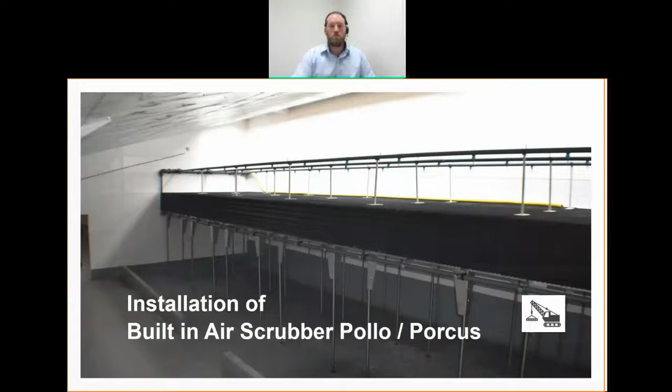This presentation is instruction on the installation of Pollo and Porcus built-in air scrubbers produced for Big Dutchman. Today's content will go through some of the considerations when building built-in air scrubbers, some of the requirements, and we'll go through the build of the table, the build of the pipework, and the placement of skids.

Biological and chemical air systems are built the same. There is a difference in the package. This is usually the thickness. You'll be supplied both 600 millimeter and 900 millimeter depending on the system. For chemical systems, a dosing system is used to inject sulfuric acid into the process water. For biological systems, dosing is an optional extra to stabilize the pH.

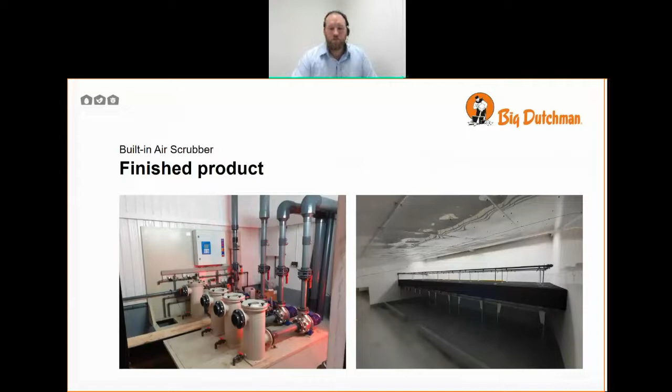Considerations: Are the air scrubber rooms the right size? Is the hanging wall the right height? Is the roof high enough? Are the holes for the drip catchers right? Is the technical room big enough? Are utilities available where required? Is there an access door to above the package area? Can holes be made from the tech room to the air scrubber room? All things you need to consider before moving forward to the build stage.

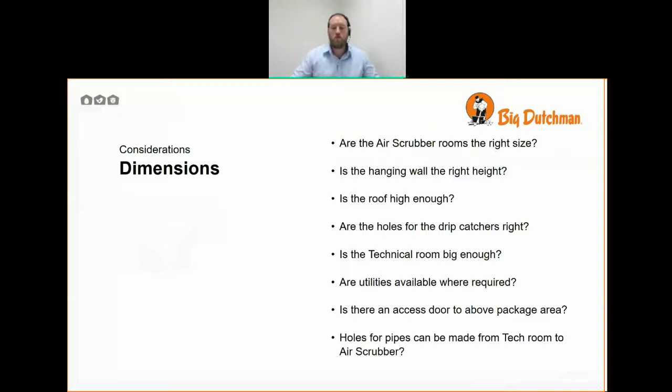For the process pit, are the pits and the underpasses the correct size? The technical room must be 300 millimeter higher than the lowest point of the air scrubber floor. I'll say that again. The technical room must be 300 millimeters higher than the lowest point of the air scrubber floor.

The process pit and the buffer area under the table must be built to hold water. And of course, all of the flooring and all of the pits must be coated so that they are both water and acid proof.

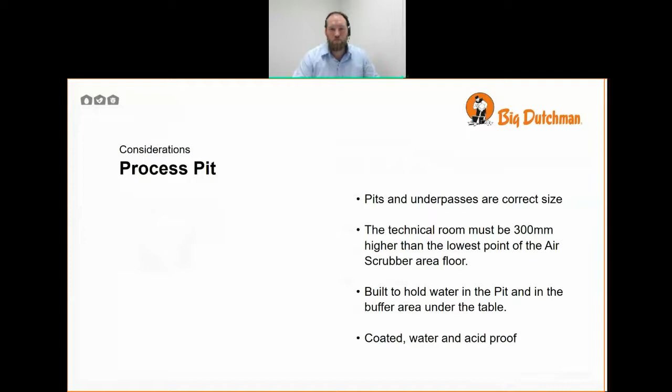Utilities: you will have and will require electrical power in. Do you need an electrician? There will be both water in and wastewater out. Do you need a plumber? There'll be pipework to build from the pump all the way up to the sprinklers. Do you need a plumber for this? And you'll need to build the table and lay in the packages. You'll need labor and people to carry out this work.

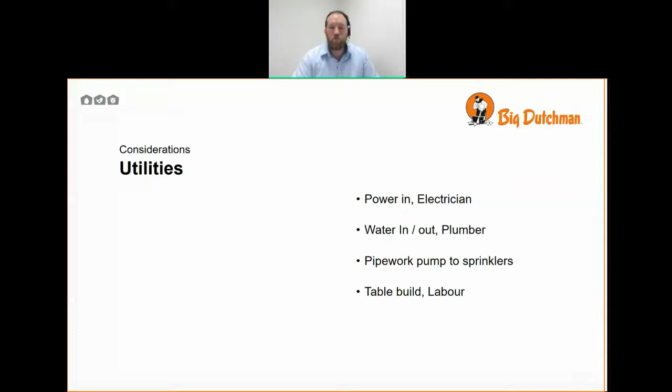Tools: you'll need spanners, sockets, impact drivers, drills. We advise that you have a step drill at least up to 17 millimeters for fitting the pre-sprinkling sprinklers, screwdrivers, hand tools, all regular things that engineers would carry. You'll need grinders with both cutting and sanding discs. This will be for cutting and trimming PVC pipe work, but it could also be required that on site something needs to be adjusted to fit with the air scrubber.

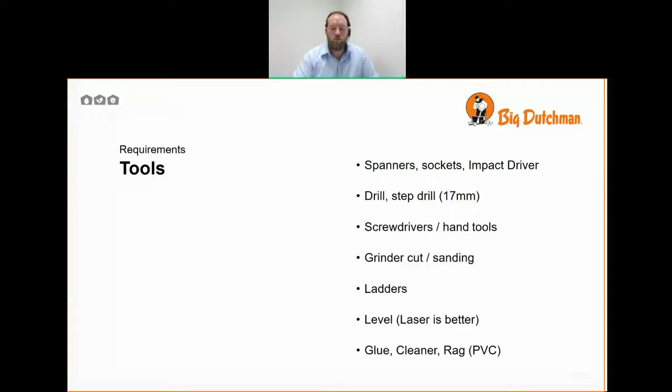Ladders to gain access to above the package area. Levels - it's very important this installation is made level. We use laser levels and we find they're much better, but a spirit level will do if you're in a pinch. And of course, for the pipe work, you require the correct glue or pipe cement, the cleaner for PVC pipe work, and rags to clean off the cleaner as you're working.

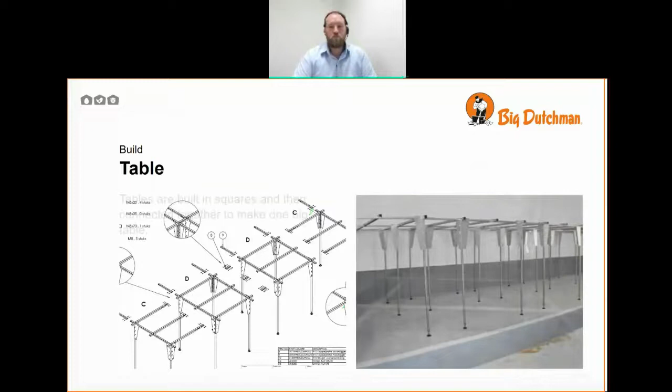Moving on to the build. The first thing we'll build is the table. This is kind of what the table looks like. This is what we refer to as the table. Tables are built in squares and then connected together to make one big table. They may be 1, 2, or 3 deep and as many wide as the concept allows.

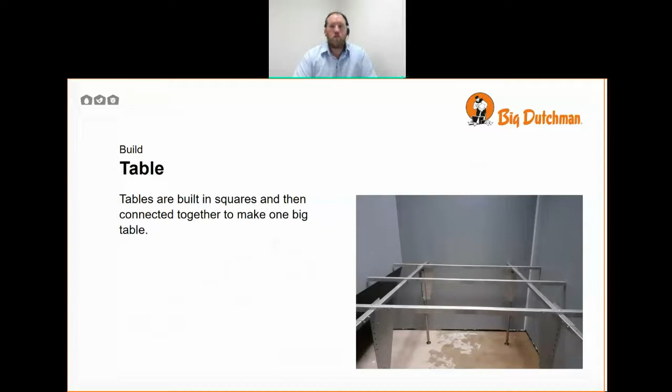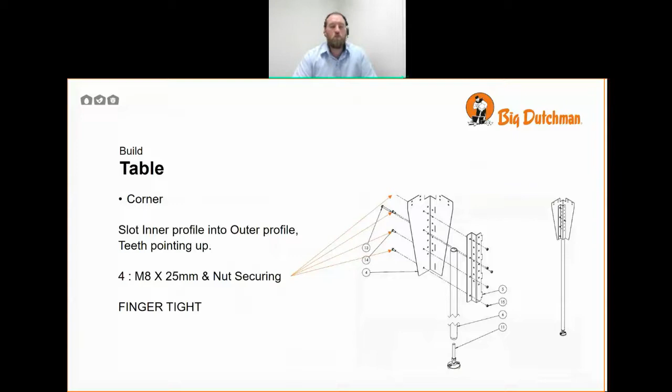We start with making a corner. Slot the teeth of the inner profiles into the outer profiles with the teeth pointing up. This will line up 4 holes on the other side. With 4 M8 by 25 bolts and nuts, we secure these together, finger tight, as loose as possible. For most of the build of the table, we leave everything as loose as possible. So you can see there, the bolts are still nice and loose.

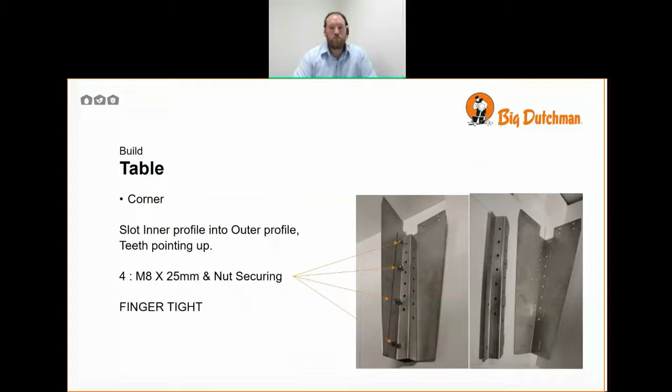For the leg, we lubricate the thread, the M16 thread of the foot, before screwing it in halfway. It's important to lubricate the threads so the table height can be adjusted easily later on. We suggest you use copper grease, though you could also use lithium grease or even silicone grease.

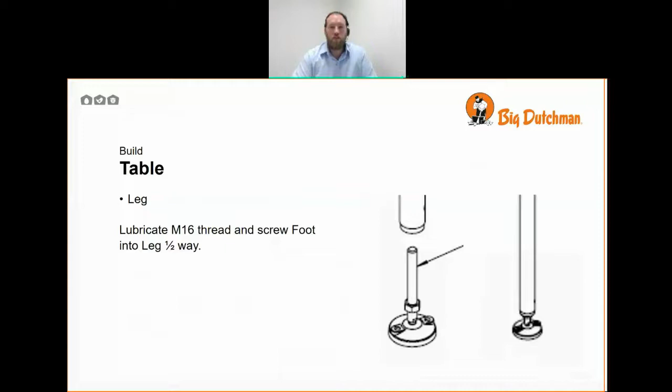The lubricant you use isn't so important, but the better the grease you use, the longer it will last, and the longer you will be able to adjust the table.

Don't tighten the lock nut just yet. Leave it wound all the way down, as you can see in the photograph.

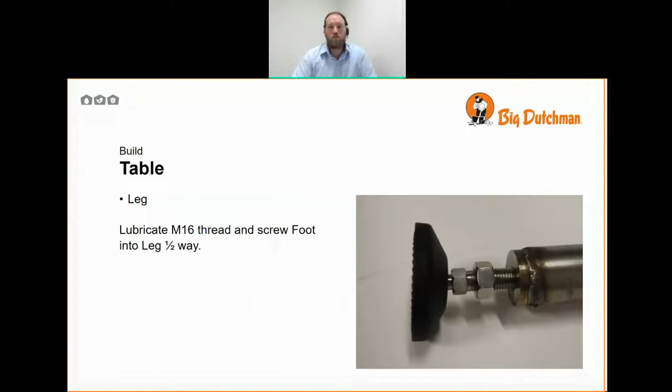Slide the leg into the small end of the profile and use 1 bolt through the holes to roughly set the height of the table.

For this, we use 1 M8 by 75 with a nut, again finger tight at this point. Everything should be able to move nice and freely so that when we get it in place, we can adjust it.

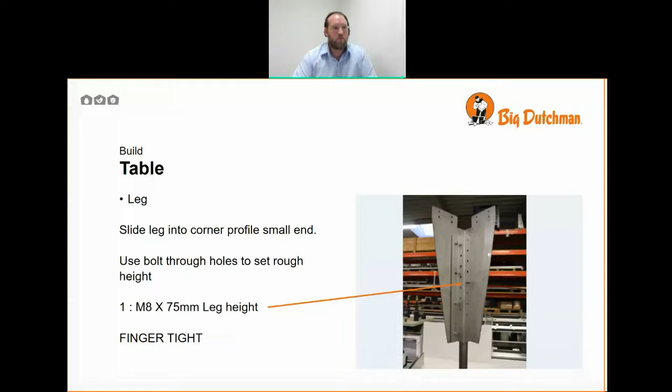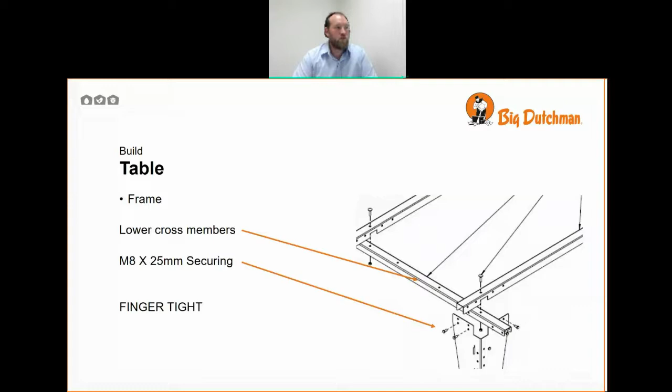For the frame, we have lower cross members that sit across and connect the corners together. These are connected at each corner with 2 M8 by 25, again finger tight.

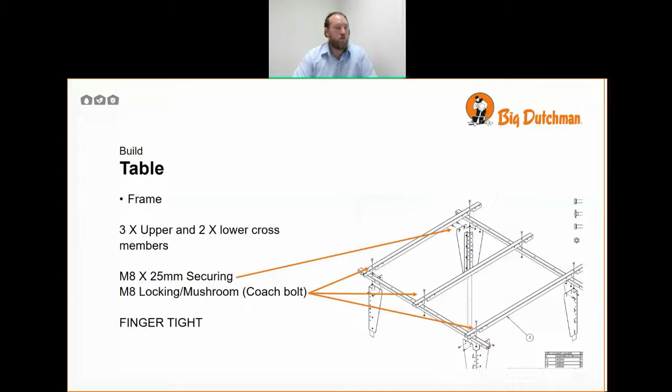On top of that, we have 3 upper cross members, again connected in the corners with 2 M8 by 25s, and then connecting down from the upper cross member to the lower cross member with a mushroom or locking coach bolt with a square head under the mushroom. Again, these are connected only finger tight.

So we end up with the square table looking something like this.

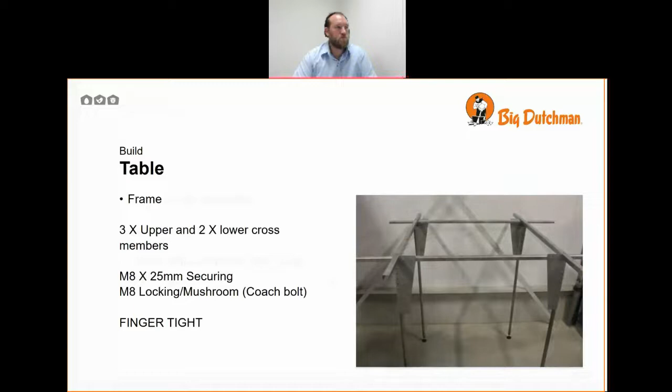Connecting the tables together, we use connection pieces that fit either end with 4 M8 by 25. These are only between the tables. The tables connect end to end, with no distance between them.

We do this until we have all except the last section of table built. Don't build the last section of table yet. I'll make that clear in a moment why.

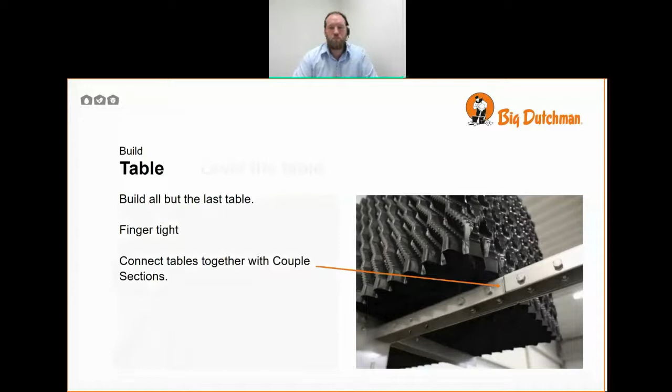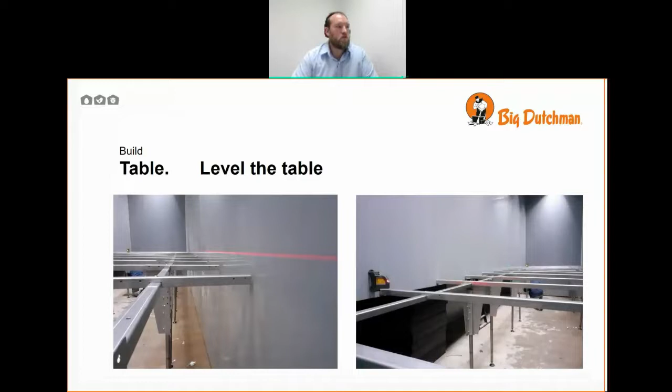Level up the table. We cast a level over the top of the table so that we can see exactly where we are, and then, using a monitor on each corner, we level up by twisting the leg on the thread of the foot. This adjusts the height of the corner to the right height.

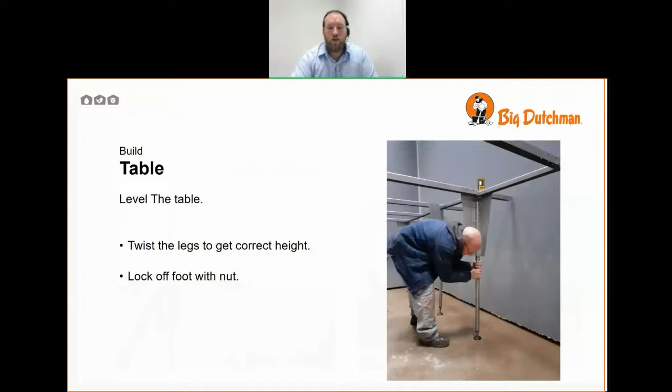We work from one end to the other in one sweep, and once the leg is at the correct height, we lock off the locking nut at the bottom to set the height, and then the whole table is correctly adjusted.

At this point, the whole table can be tightened. Every single nut and bolt, you can walk around and tighten with your 13mm impact driver to get every nut and bolt nice and tight.

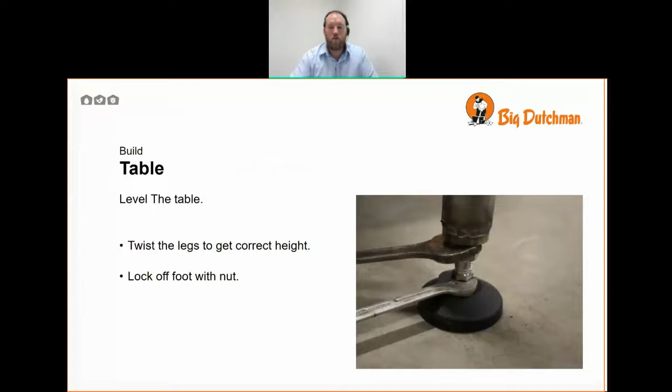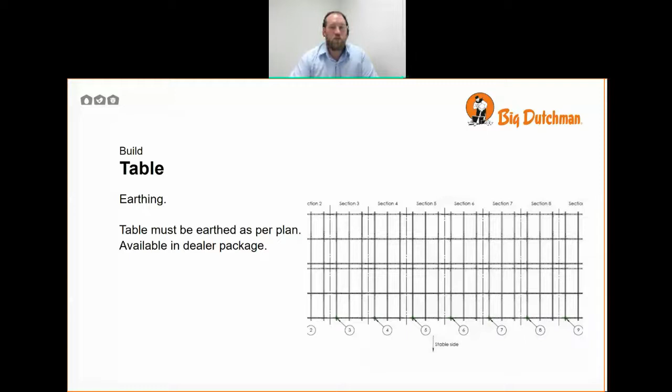Earthing: the table must be earthed as per the plan available in the dealer package. As shown, this is one earthing point per section. 3mm stainless steel cable is provided.

Make a loop with the stainless steel cable and remove one bolt from the table where required. Reinstall with a washer to retain the cable end. Thread the cable through the table back to an earth junction box in a dry part of the air scrubber. Connect the junction box to the earth bus in the bottom of the main control panel.

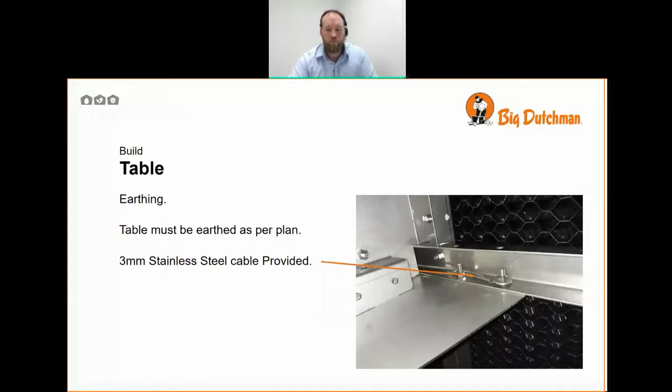Any questions so far? Okay.

At this point, we can load in the plastic packaging. We lay this hard side down to start with. We lay this out in a pattern that is opposite 180 degrees, end to end, and side to side.

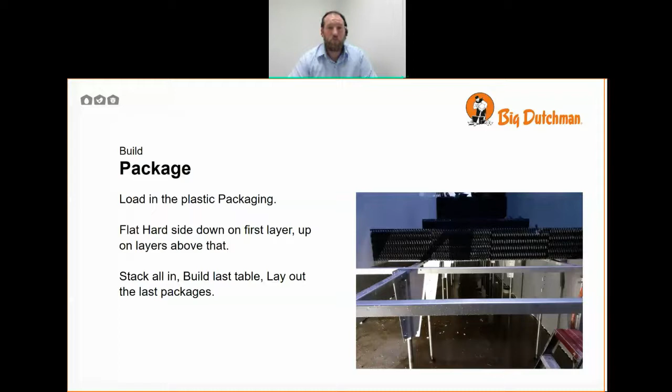If you have multiple layers, this is also opposite bottom to top. The reason being the packaging material has a diagonal fall through it, so the water will run backwards and forwards and remain as long as possible in the package, giving us a longer air-to-water contact time.

Load in all the packaging, all the long lengths of pipe that you require for the pipe work. Build and tighten the last table, build, level and tighten the last table, and then relay the last packaging over the area that you've just built.

The packaging can be walked on, but take care to avoid sharp edges, heavy tools, or any harsh twisting steps. Ensure that there is an access door before you finish the last packaging, the last piece of the table. Otherwise, you won't be able to get in and out.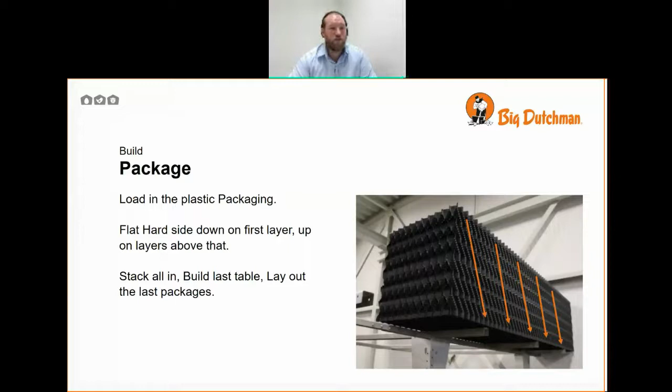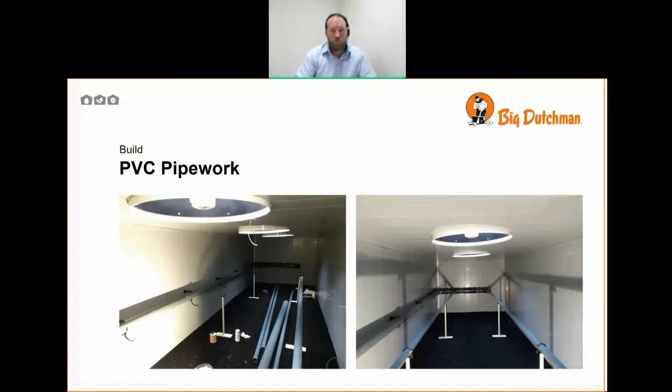Moving on to the PVC pipework build. A drawing will be provided in the manual. Use a laser level or even a spirit level for mounting all the pipework on the walls.

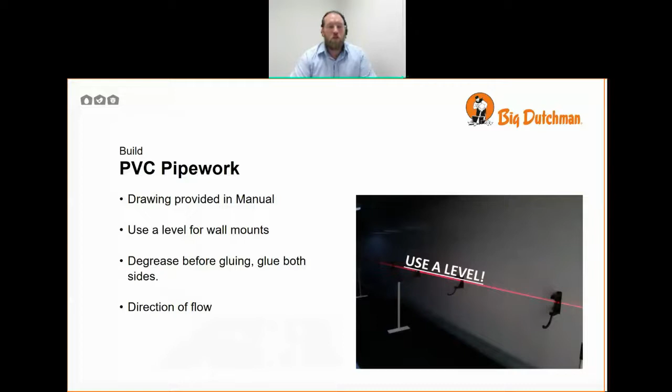Degrease both sides of your joints before gluing, and glue both sides. Pay attention to the direction of flow of individual parts. Make sure you remove parts like taps, glue and clean and glue the fittings before reinstalling them. Don't close any of the retaining clamps until all of the pipework is complete.

In the dealer package, drawings are provided so that you know the dimensions of each part of the pipework.

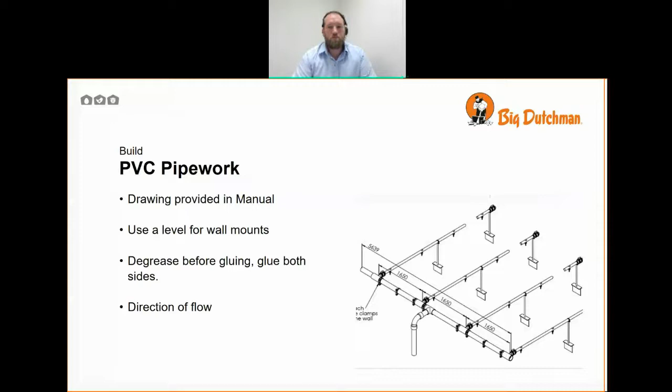Sprinkler lines are built out of pre-cut lengths of pipe supplied with a T-section fitting that allows a sprinkler to be attached. The first sprinkler must be installed at the right distance from the end wall. Some cutting may be required. Ensure all sprinklers are on the same side of the pipe, and the pipe is correctly placed so as to position the sprinklers at the correct distance from the front and rear walls.

There are taps at both ends. The taps before the sprinkler line are to shut off the sprinklers and to divert flow to a wash hose when opened. The tap at the other end of the line is for flushing.

The two taps can be slightly loosened, allowing the sprinkler line to be turned in its mountings, with the sprinklers pointed up. Both taps can then be opened, allowing the line to be flushed. This is most beneficial when new, as the production process will leave plastic contaminants in the system that could block the sprinklers.

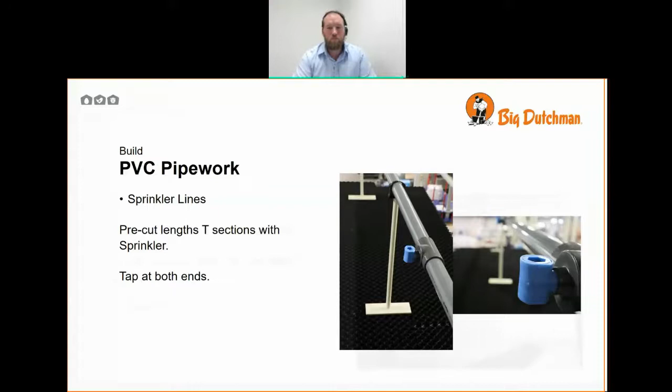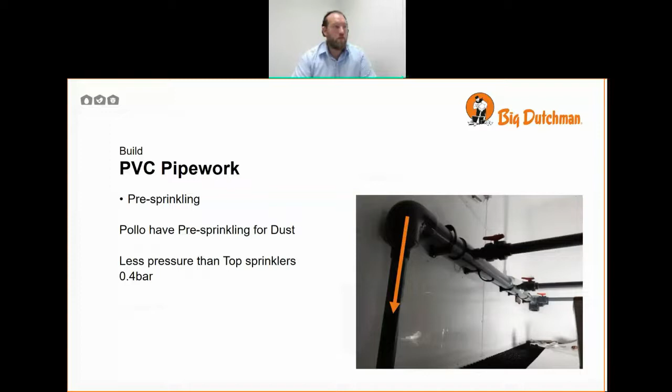Pre-sprinkling. The Pollo air scrubber is fitted with a pre-sprinkling system. The sprinklers for this require less pressure - they only require 0.4 bar.

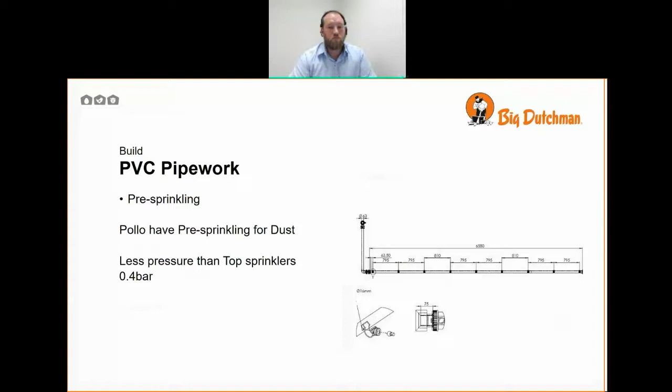When setting up the system, we'll use the first tap on the pre-sprinkling system to set the pressure with the gauge provided. After this, the tap will be removed. The second tap is then for use by the user to switch off or isolate the sprinkler line, turning off the water as and when required.

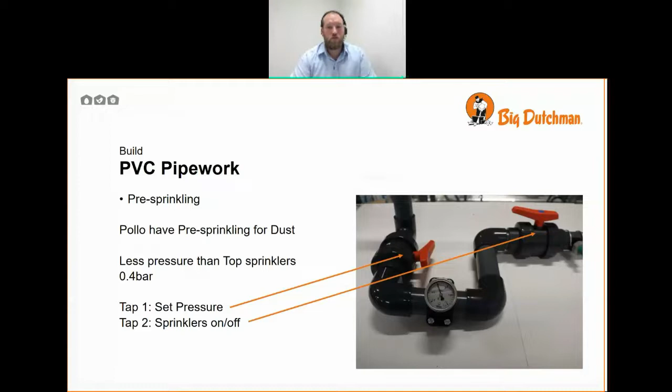The sprinkler line is hung on the edge of the table with pipe clamps or specially provided stainless steel clamps.

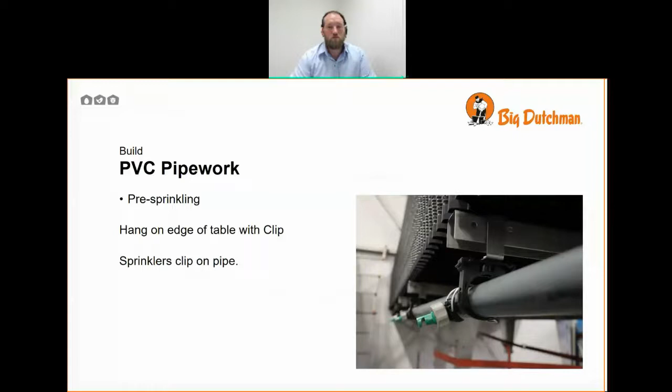The wash hose is also provided with a tap on the main manifold. Before the air differential pressure gets too high, the packaging must be rinsed to clear blockages. It is about high flow and low pressure.

Do not use a pressure washer. You will destroy the packaging material.

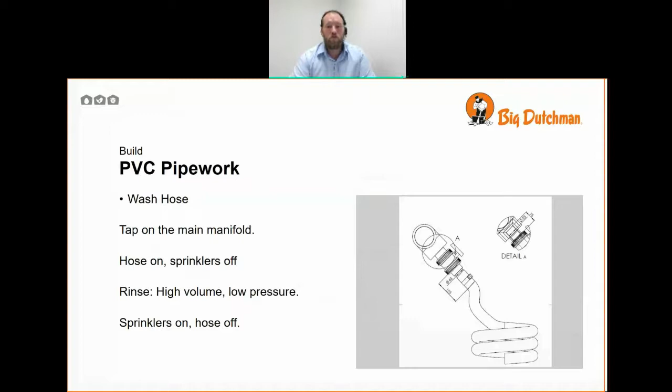Wearing a full rain suit and correctly protected from the water in the air scrubber, open the tap for the cleaning hose before closing the sprinkler lines. This will allow the flow to be diverted instead of closing the flow altogether.

Here you can see the taps for the sprinkler lines and the tap for the wash hose at the back.

Use the hose to rinse the package in a methodical sweeping motion. It should take 45 seconds to a minute per square meter to rinse through sufficiently.

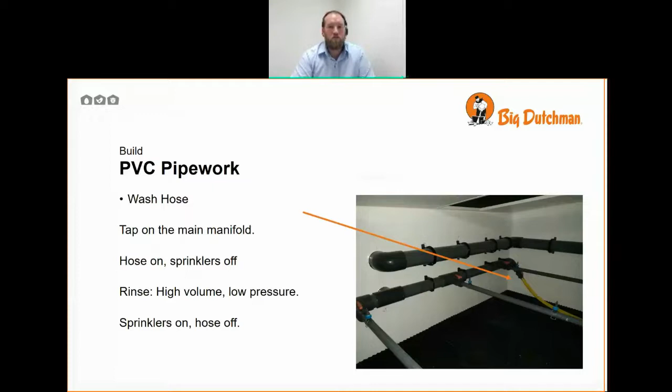Are there any questions on packaging, pipes, sprinklers, pre-sprinklers, or the wash hose?

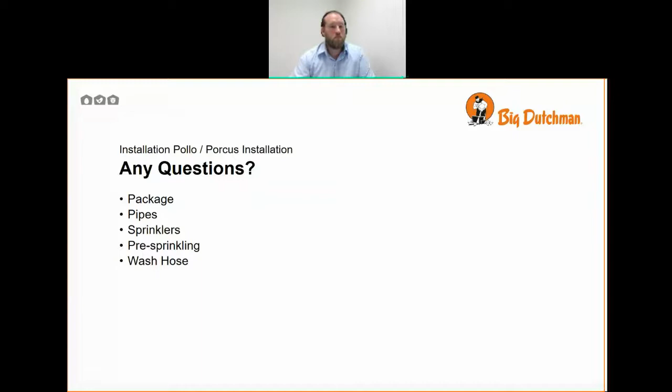Placing the skids. Place the skid with the suction pipe end over the pit nearest the air scrubber.

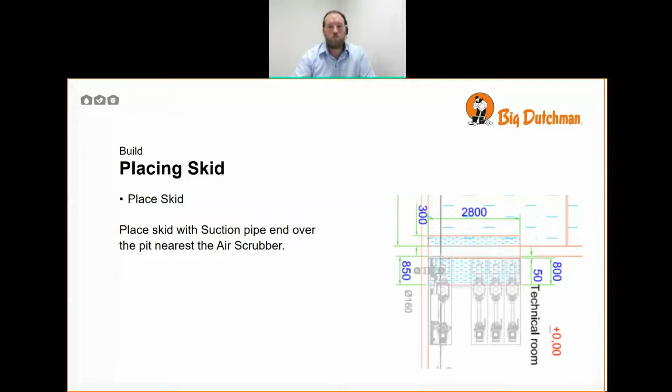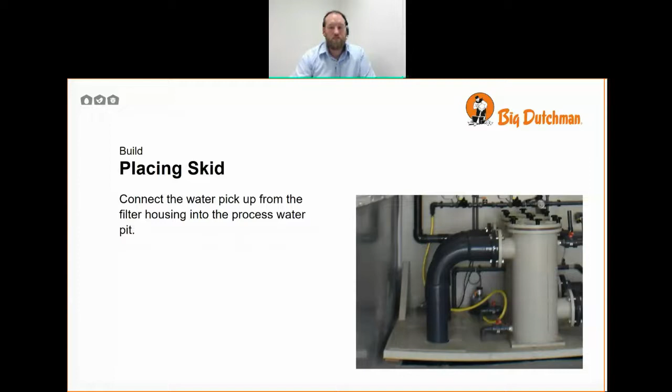Connect the water pickup pipe from the filter housing down into the process water pit. Connect the pump output to the air scrubber pipework in the air scrubber room through the wall. This will require sealing at the wall.

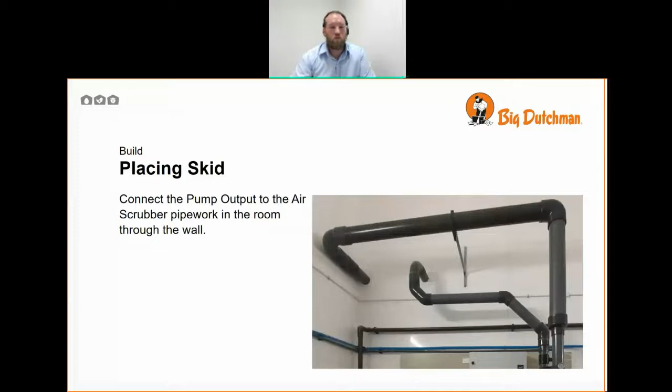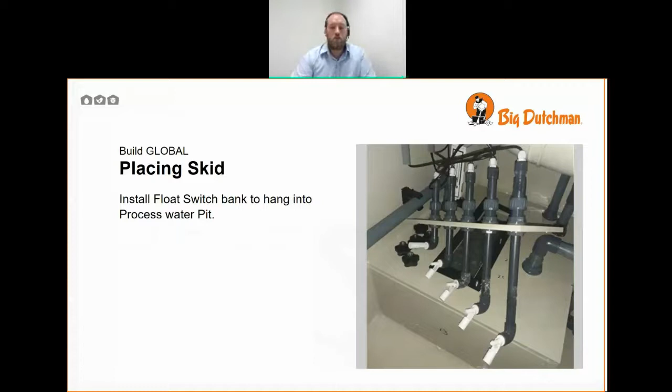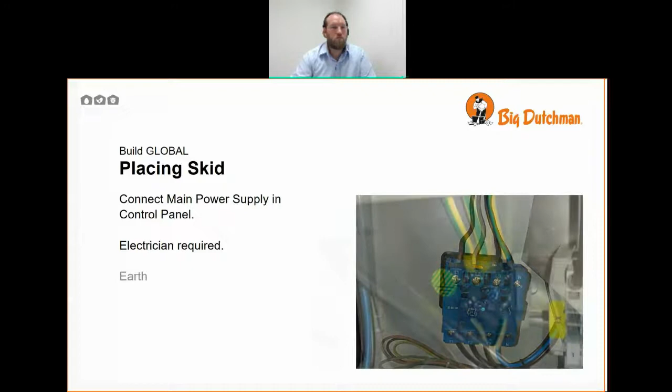Connect the main earth to the main earth bus.

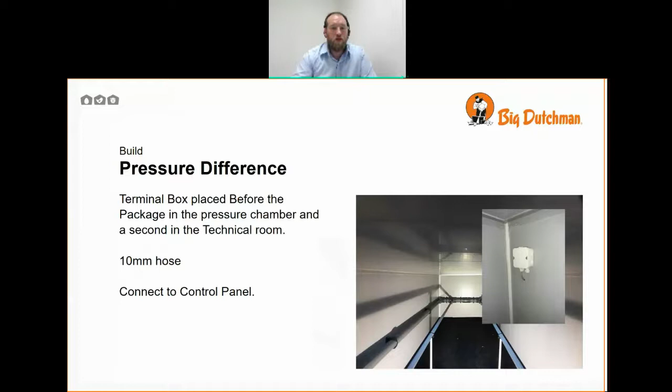Pressure difference. Terminal boxes are placed before the package and in the pressure chamber, and a second in the technical room. These are connected with a 10mm hose.

The hose must be looped inside the terminal box so that any drips or moisture that form on the hose will fall downwards and not enter the hose. It's also advised that you cut this at a 45-degree angle, allowing condensation to form drips and to drip off and away from the hose.

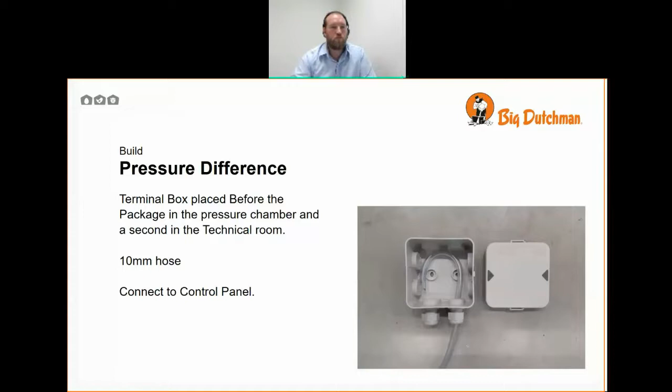Connect them to the underside of the control panel.

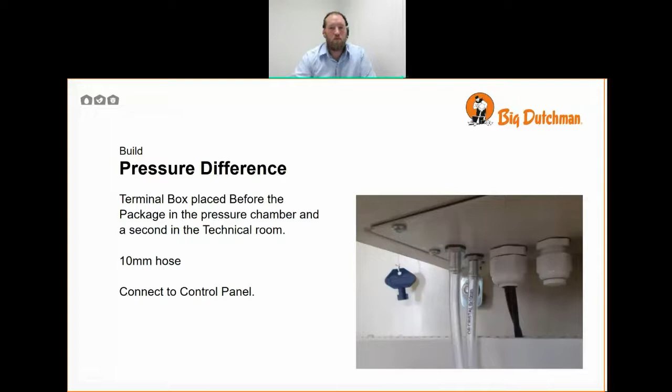Waste can only be pumped up to a height of 8 meters. This is worth bearing in mind if you're using silos. It can only go 8 meters uphill.

As mentioned before, we slope the drain line back towards the technical room, and there is a tap on the drain line that can be ever so slightly opened to allow the excess water still in the drain line to slowly drain back to the pit, leaving our drain lines empty and not exposed to freezing temperatures in winter periods.

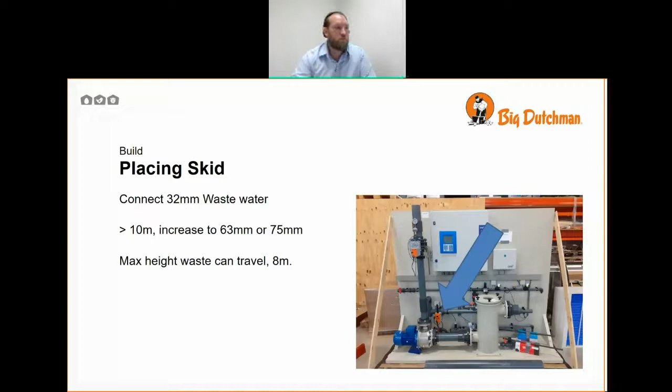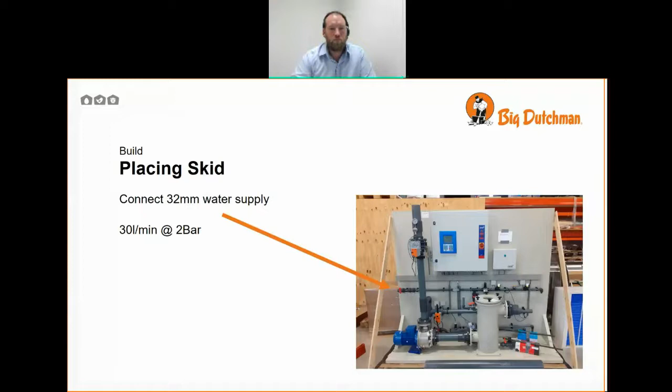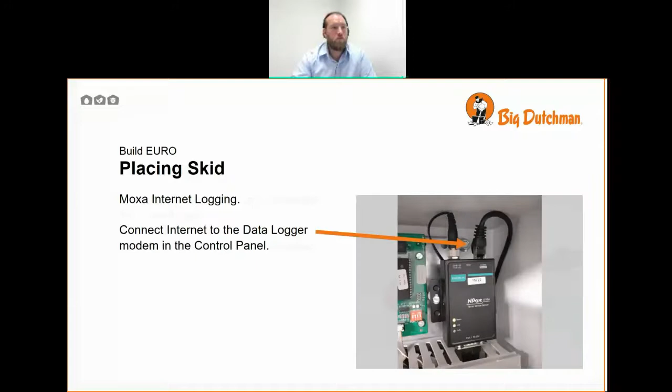Mounting an alarm light. An alarm light is supplied with the system and can be mounted wherever the client would like. We do supply 12 meters of pipe and cable for you to achieve this.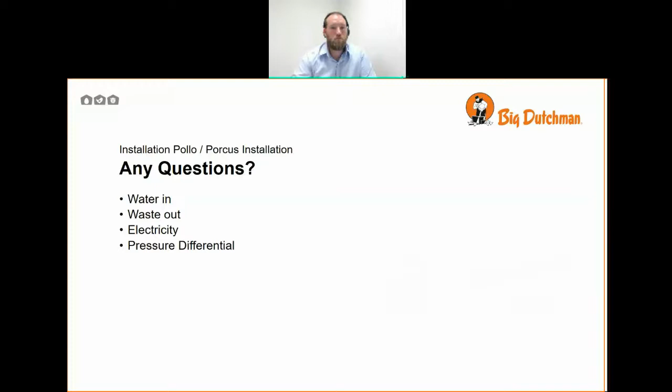Installation requirements for acid and alkali storage rooms. The door openings will need to be 2.4 meters wide and 2.2 meters high for easy access with the acid and alkali tanks.

Pumps and safety material and the emergency shower must always be freely accessible. The last thing you want is one of your colleagues covered in acid and unable to get to the safety equipment.

The room must be large enough for the equipment provided to be free and easily accessible. Again, large enough to move around and to get yourself under the emergency shower while you're covered in acid.

Piping for the acid and alkali must be a maximum of 15 meters from the injection point. That is to say that the pumps can only pump 15 meters. You want to try and install these pumps as close as possible to reduce that distance, and this will cause you less issues in the long run.

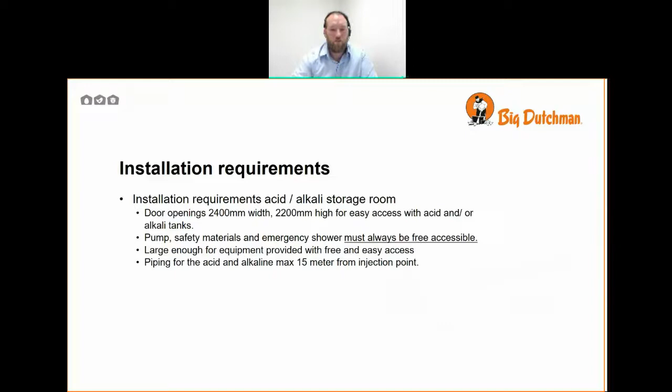As you can see in the photographs, clear and easy access. You don't want the pumps behind the containers or any of the safety equipment not able to access.

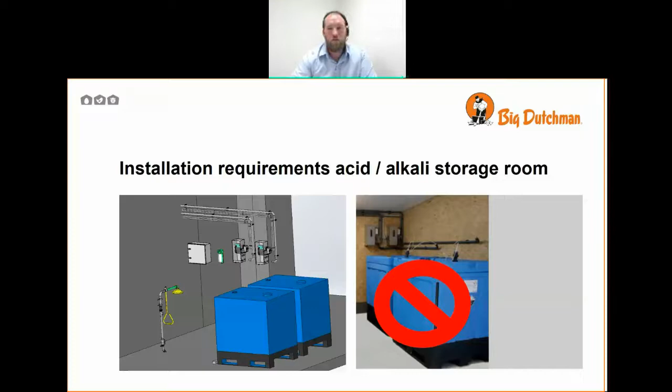For acid used in chemical air scrubbers, we use sulfuric acid, H2SO4, of 96 to 98%. For biological air scrubbers, we can use, as an optional extra, sulfuric acid 37% or sodium hydroxide 33%.

All chemical hoses are run inside UPVC piping to protect them. Warning stickers are affixed to these pipes. They are not glued together, so they are only pushed together to contain any spillages.

The tube used for the chemical lines: for acid we use PVDF (polyvinylidene difluoride), and for alkali we use LDPE (low density polyethylene).

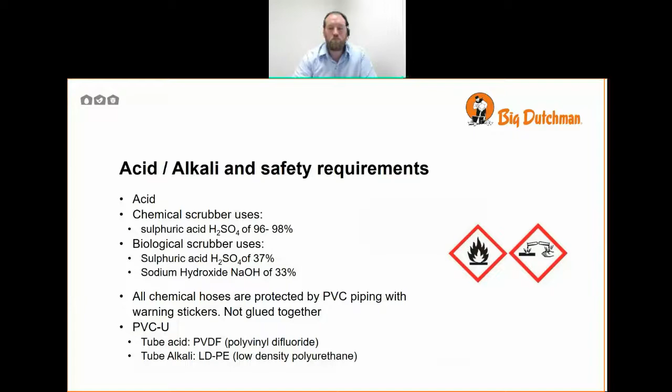For safety, we provide a face shield, a front apron, PVC gloves that are chemical resistant category 3, an eye wash bottle with a wall bracket, and an emergency shower.

The emergency shower has a 32mm PVC connection and must be provided with 90 litres per minute at 3 bar. This supply must not be interruptible. Don't put a tap beforehand, because if the shower starts to drip, the farmer will just turn it off instead of fixing the leak.

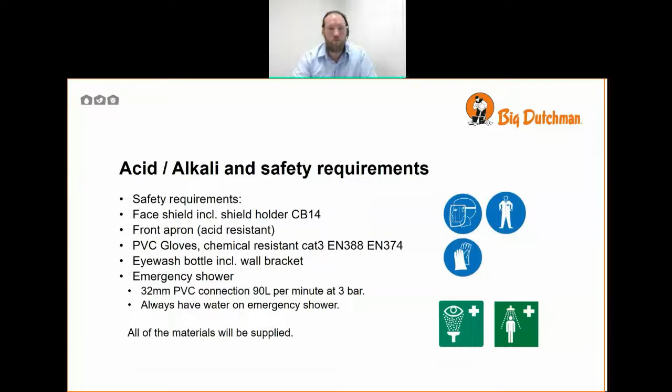So as previously discussed, 15 meters maximum from the pump to the injection point, 90 litres per minute uninterrupted.